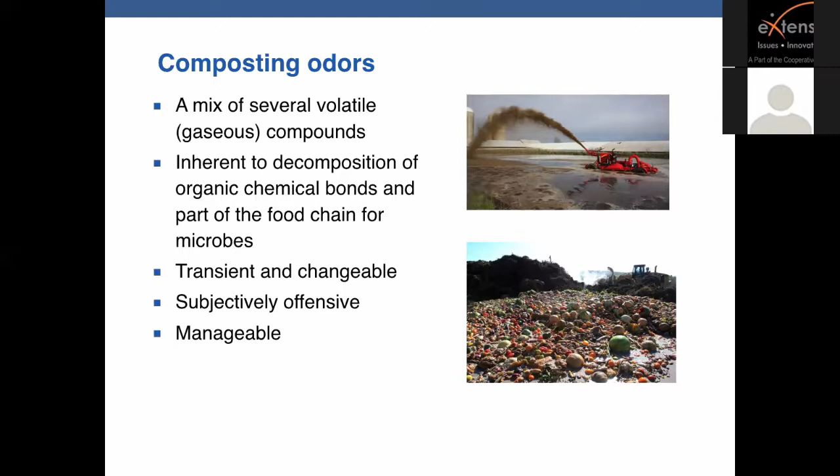Let's look a little bit at the concept of odor science, which is a very well-developed science in our country. There are different kinds of terms you'll come across in the field of odor science. Odor concentration, much like an air pollutant, is usually a mass per unit volume. Odor intensity is a subjective scale relating to how intense the odor is. Persistence is a little bit of a different concept than intensity—persistence is how certain odors can have very long duration.

I'm sure many of you have visited various waste management facilities, and while the odors weren't strong, you get back in your car and 3 hours later, you're still noticing that odor in your clothes. That's a persistent odor. Ammonia, on the other hand, you detect it, but it doesn't stick around a long period of time. Ammonia is not a persistent odor.

Character is obviously a subjective concept - is it pleasant? Is it okay? Is it not so okay? Is it truly egregious? And hedonic tone is another measure of the unpleasantness of an odor.

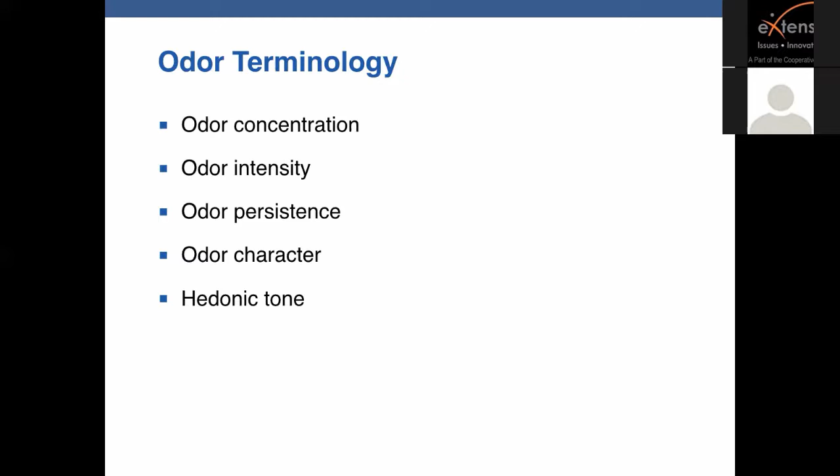Now, in terms of concentrations of odors, we use terms called the odor detection threshold and the recognition threshold. The odor detection threshold, or the perception threshold, numerically is about 1 odor unit per cubic meter of air. It is the minimum concentration in which you can detect an odor. That's that classic whiff of something you get and you go, what's that?

The recognition threshold is the concentration at which you can identify what that odor is, and it's usually 2 to 10 times the odor detection threshold. Dilution to threshold we'll get into in a minute - that's another term you'll see in odor management. Odor units and odor dilution units are also numerical values that you will see.

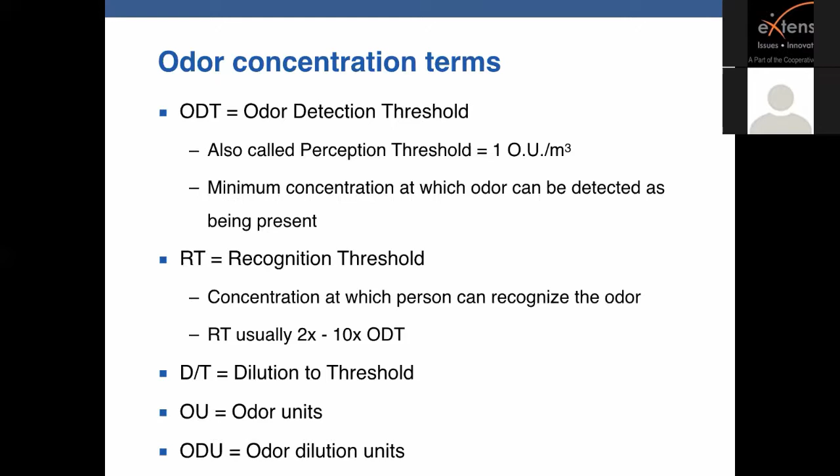The potential for something to become an odor depends on the volatility of that chemical, and volatility is the ability of the odor to leave the processing environment as a gas. As we mentioned a minute ago, the recognition threshold is the ability for that odor to produce some sort of response - positive, neutral, or negative.

And it varies from person to person, as I said earlier, because the DNA that makes up our odor neurons in our sinuses differ from person to person.

Odor concentrations can be correlated with a concept called odor index, which is the logarithmic relationship between the concentration and an index value. As you see here in the example calculation, if an odor is 500 odor units, the odor index works out to be 27.0. We'll show you some examples of that here in a minute.

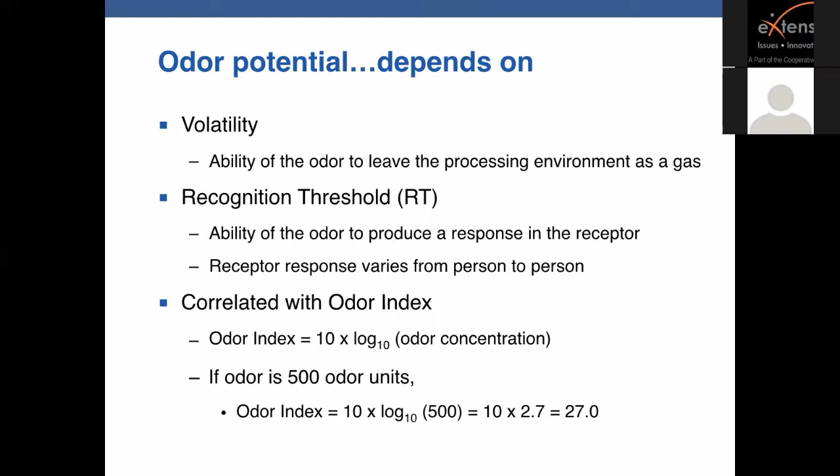Odor indices, as I mentioned earlier, is a logarithmic relationship between concentration and a numerical index value, and you see some examples here. This is from the world of wastewater treatment and sludge management. For the most part, some of these are obviously very strong odors, and you can see the various odor indices in the left column. The third column from the left are the odor units or the dilutions to threshold, and then on the right column is the list of examples of where they come from.

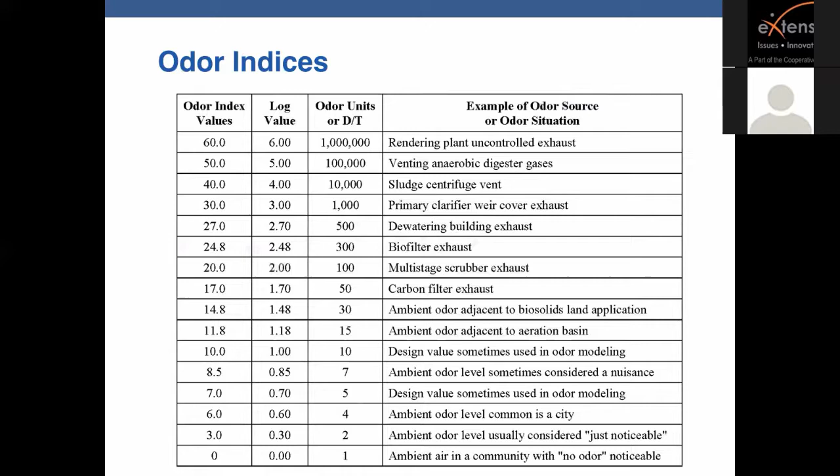Now, dilution to threshold is a physical process in the atmosphere, downstream of the source. Those of us who have been in the environmental industry for a long time remember in the early days there was a phrase called 'dilution is the solution to pollution.' That phrase fell out of favor because it implies that you can merely make the problem go away by diluting it. But in the case of odors, that's exactly what you have to do - you have to dilute the odor to get it down below the detection threshold or below the recognition threshold for sure, and ideally below the detection threshold.

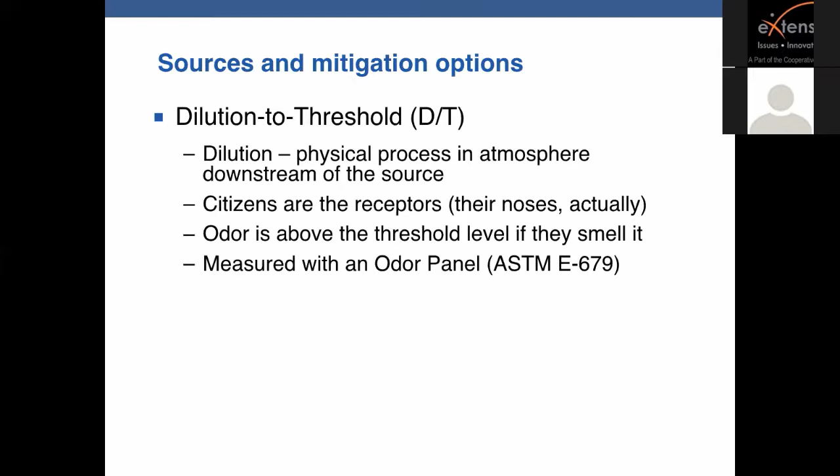So dilution to threshold is a mathematical concept, and there are ways of measuring it. The American Society for Testing and Materials has a national standard for measuring odors with an odor panel. An odor panel is made up of eight or more people who test with their noses various concentrations of a sample of odorous material. And the dilution to threshold is the number of dilutions of fresh air that are required to dilute that sample until half the panel could no longer detect it.

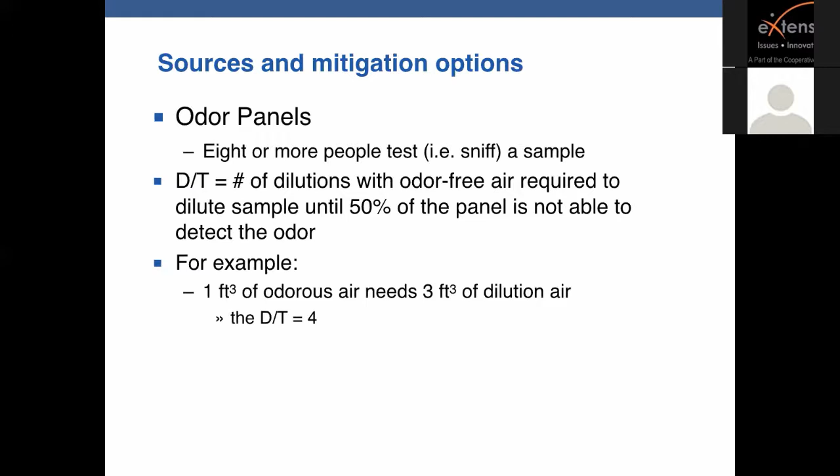So if you need 3 cubic feet of dilution air to dilute 1 cubic foot of odorous air, then dilution to threshold equals 4. Most states regulate odors on the basis of a nuisance standard, which is challenging in and of itself. There has been a lot of discussion about regulating odors based on dilution to threshold numerical values because those are measurable values, though there are some challenges in how you measure them.

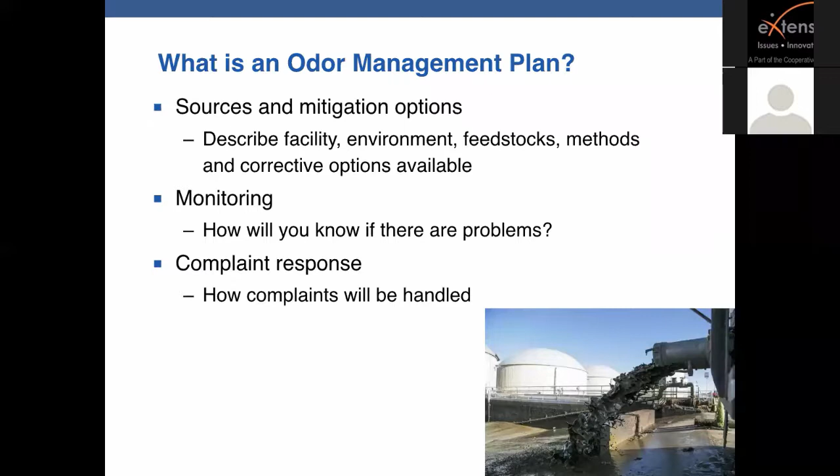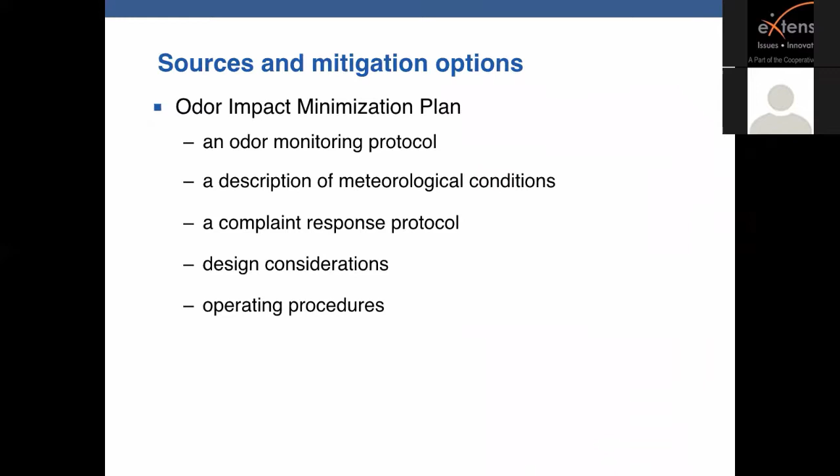Another term for an odor management plan is an odor impact minimization plan, and it has these elements: your monitoring protocol, an understanding of the meteorological conditions of the site, how complaints are handled, and how design and operating considerations are managed.

As I mentioned earlier, we have this concept of the odor chain. Odors are formed in composting and digestion, transported off-site by meteorological conditions, and the receptor, the human nose, perceives them and reacts to them. So in order to control odors, you have to break this chain somehow.

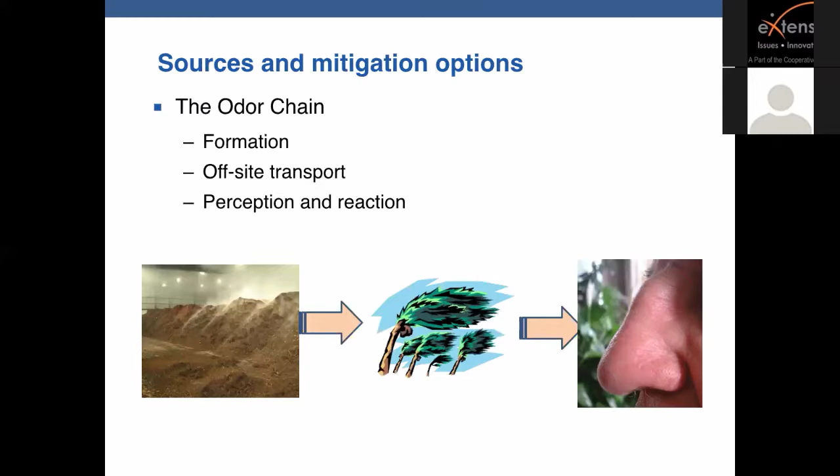Let's start with odor formation. Odors come from a number of sources in our biological manufacturing facility, which is the real concept behind composting. We have feedstocks that come in from off-site, which can be odorous. There are various preparation and mixing steps that can create odors. Active composting creates odors because of the decomposition of carbon, hydrogen, oxygen, nitrogen molecules in the pile. Curing can have odors, screening can have odors, and water management as well as dust control can have odors. So all of those are different sources in a facility.

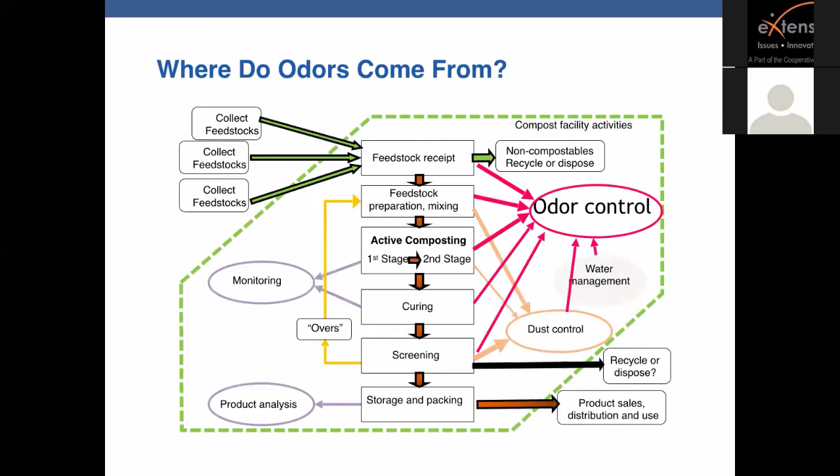This is some data from a project in Oregon a few years ago where they were having odor problems. They sent a team of air quality engineers who did detailed air sampling and analysis, and were able to find the percentage of odors coming from different sources. Obviously composting and curing would be expected, but they were surprised that 30% of the odors were coming from the biofilter, because the biofilter had been allowed to dry out and was short-circuiting, so odors were not getting treated by the filtration system. We'll talk about biofiltration a little more here in a minute.

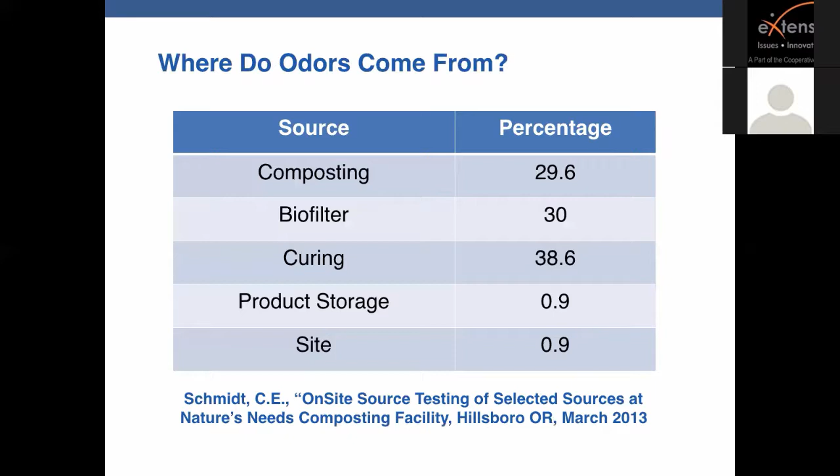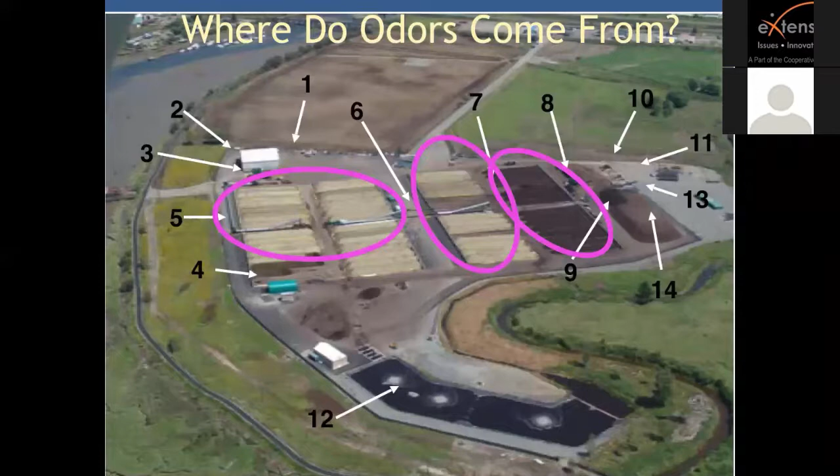This is the Cedar Grove composting facility in Everett, Washington, a 160,000 ton per year facility that uses the Gore microfabric aerated static pile composting technology. They have had a large number of problems with odors over the years and have spent many millions of dollars managing it. In their analysis, they found 14 different locations producing odors, so it wasn't just at the front end of the facility. The white building on the left, upper left, is the receiving building for solid waste and food waste coming in from the Seattle area, and grinding. The first pink oval is their active phase 1 composting, the second to the right is phase 2 composting, the third is curing, and beyond that is their screening and product storage area. Notice at the bottom of the photograph they have an aerated stormwater lagoon, and those aerated lagoons can be a source of odors. So 14 different sources at one particular facility that have to be managed in one way or another.

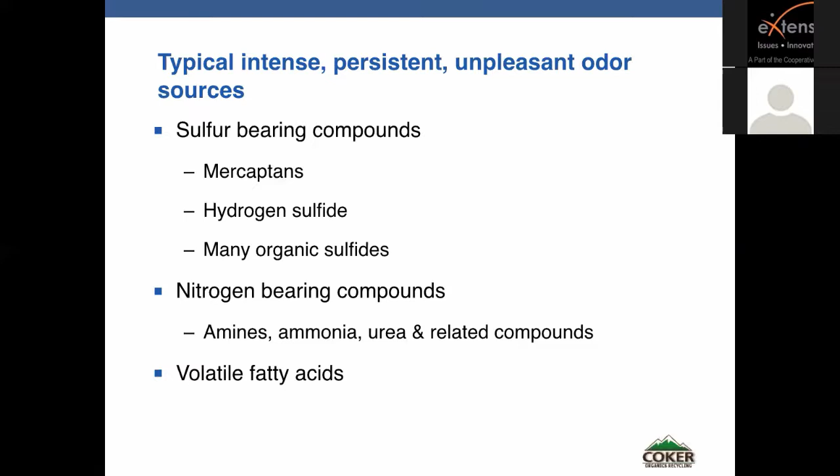What kinds of chemicals do we see in the odor profile of most composting facilities? We see the worst odors from compounds that contain sulfur, including chemicals called mercaptans, hydrogen sulfide, which many of you are familiar with, and other forms of organic sulfides. Some nitrogen-bearing compounds—amines, ammonia, urea—also have strong odors, and volatile fatty acids have strong odors.

We find there are several biological sources of sulfur in composting. We have amino acids in proteins that contain sulfur. If those proteins decompose aerobically in a compost pile, you will get mercaptans.

If they decompose anaerobically in an anaerobic digester, you will get hydrogen sulfide. Hydrogen sulfide, not being water soluble, does have a tendency to volatilize, and it tends to be more prevalent when the pH of the material drops below 7.

In some states, we see a regulation called total reduced sulfur compounds that are regulated. This is the numerical sum of the concentrations of hydrogen sulfide, methyl mercaptan, dimethyl sulfide, and dimethyl disulfide. The last two, DMS and DMDS, are organic sulfides. We see them a lot in sludge composting.

The first facility I worked at in the 1970s and 80s was a sludge composting facility in the Washington, D.C. area. And we had a 4-stage chemical scrubber to try to get the DMS and the DMDS out of the exhaust gas.

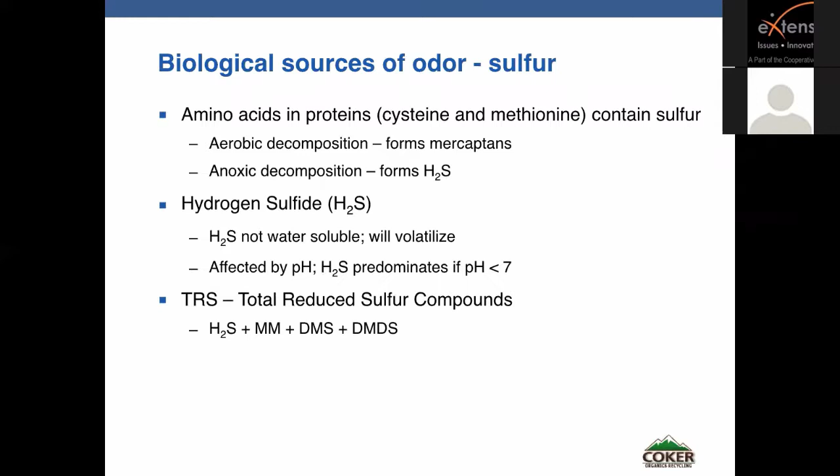Volatile organic compounds are the predominant air pollutant in organics recycling, and it could easily be argued that all odorous compounds are VOCs. Not all VOCs are necessarily odorous, but VOCs are regulated, particularly in California, where they contribute to the formation of low-level atmospheric ozone in the photochemical smog.

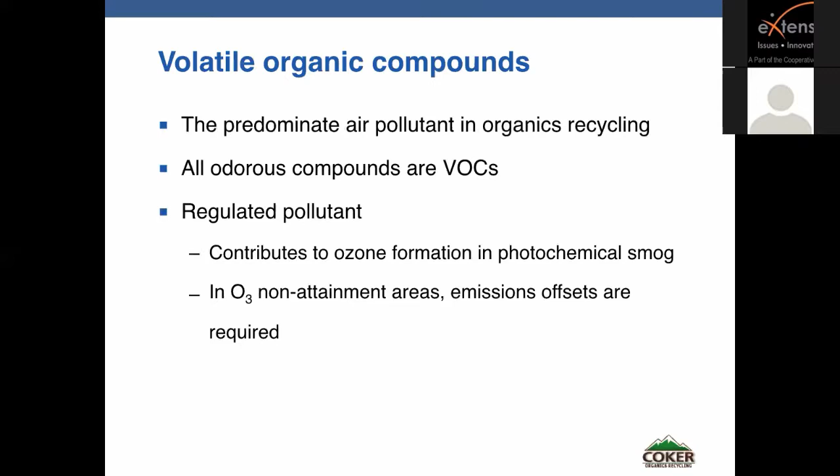So in areas where there is an ozone non-attainment, where the area does not meet national ambient air quality standards for ozone, usually some form of emission offset is going to be needed with regard to a new facility.

Feedstock receipts are a big issue in composting because feedstocks are frequently odorous when they are delivered. So if you run a facility or you have people in your state that operate facilities, they should recognize that some of these feedstocks may not be worth the tip fee because of the potential odor problems they create.

So all feedstocks need to be managed with regard to their odor potential. They need to understand their sources, their type, the potential for negative odors, and have laboratory data before they agree to accept it that understands the moisture content, the density, particle size, the degradability, the carbon-nitrogen ratio, all the basic compostability parameters that you need to run a well-defined and well-operated facility, a well-defined recipe at a well-operated facility.

Unloading protocols are important. If you're taking in liquids, you certainly want to absorb them quickly with something that's dry. You want to mix your bulking agent in upon receipt and get that material mixed and into your composting system, ideally within an hour, certainly within 2 or 3 hours.

Some of the greatest problems I've seen at facilities are where the truck comes in at 4:58, unloads on the pad, it hits 5 o'clock and the operators walk away. And it sits there all night and come in the morning and you have an odor problem.

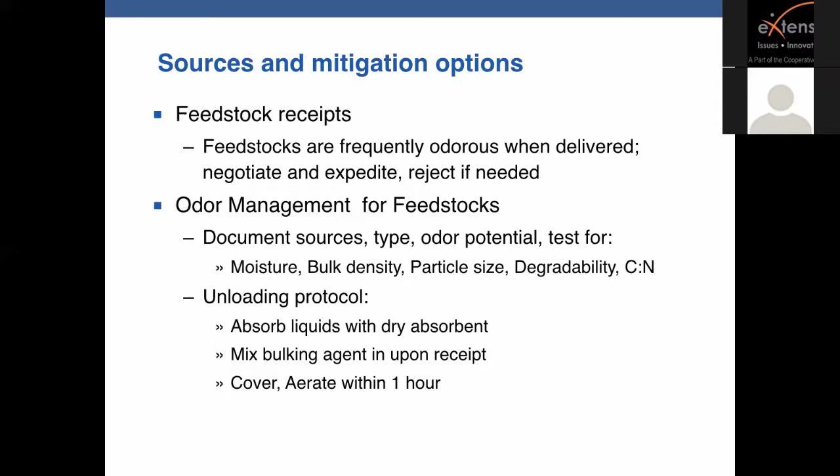So generally speaking, you would not want to receive this material if it's been sitting in that truck for more than 2 or 3 hours. And that doesn't necessarily restrict it to distance.

Consider the traffic in metropolitan areas, particularly crowded metropolitan areas like New York, Los Angeles, and Washington. Sometimes with bad traffic, it can take 2 hours to get across the city. So when these materials come out of these trucks, if they've been in there for a while, they are going to have an odor profile with them.

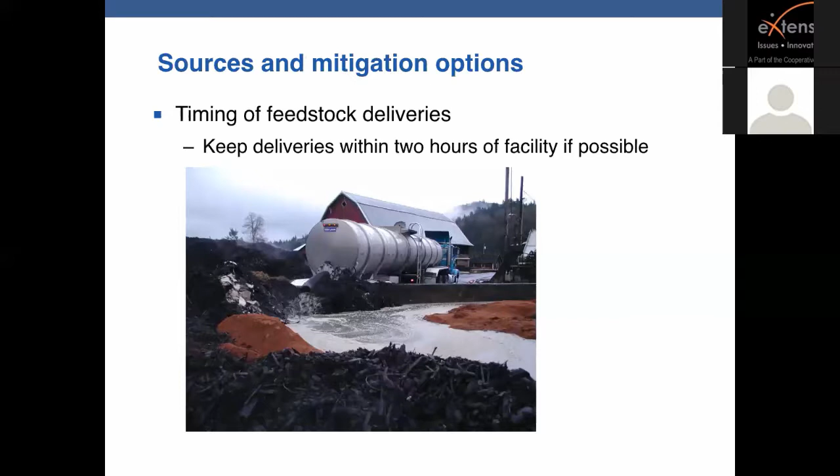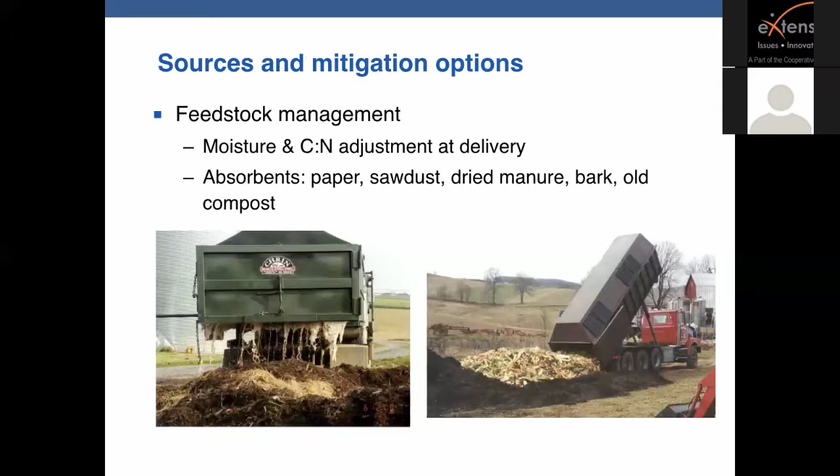Those of you who have seen food waste composting operations have seen this happen. Food waste tends to liquefy in the transport truck, and when you unlatch that back gate and open it up, there usually is a rush of free liquid that is often very odorous. So it's important that operators unload these wet, sloppy materials on a bed of dry amendment. You see here on the left a bed of mulch, on the right a bed of compost, and that helps soak up the liquids and minimize the formation of bad odors.

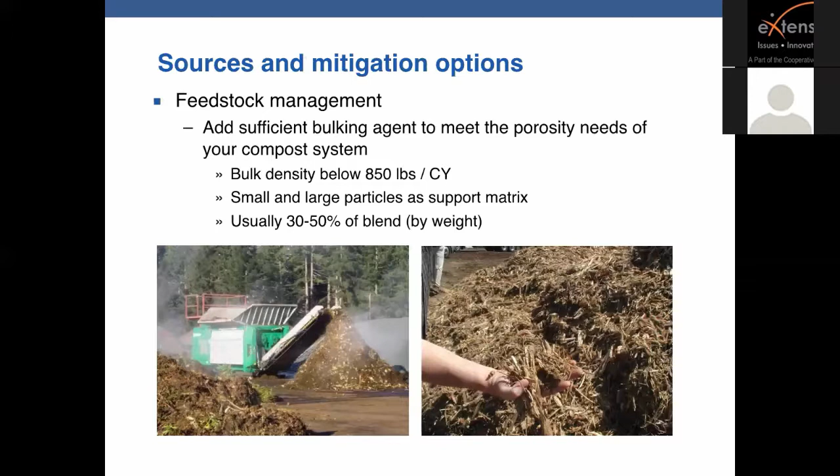You want both small and large particles in your support matrix in order to ensure good free airspace. It can be by weight as much as 50% of your total blend, and in some cases where you have woody materials with high lignin content, it can climb up above 50%.

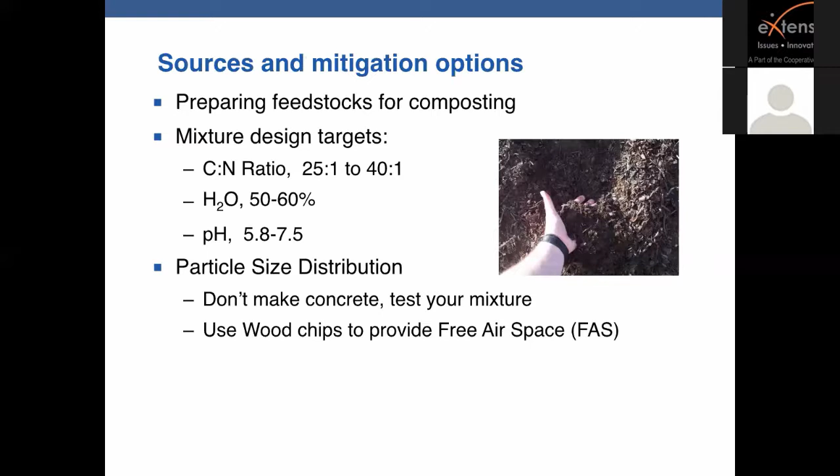You always want to mix your fresh ingredients with bulking agents within hours of delivery. Usually what you want to do is put your dry material down, add your wet material on top. If you're going to turn with a bucket loader, which is a very inefficient way of mixing, you really need to go through it 4 or 5 times to get it mixed correctly.

If you have a windrow turner, or the facility has a windrow turner, they are very efficient at mixing materials together with a couple of passes, and many facilities now have a standalone dedicated mixing system. At one of my facilities, I used an old agricultural feed mixer, and it worked just fine.

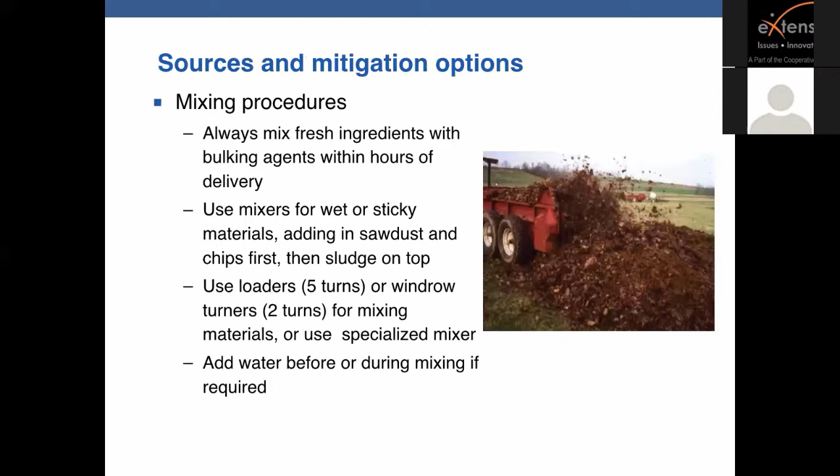Odors are going to be released most in the first 14 days of composting, because that's when the most active decomposition is going on. You have higher biological activity and higher oxygen demand. So for facilities that have aerated static piles, you have to make sure you have adequate air supply to meet that high demand in the first couple of weeks. For facilities turning windrows, you have to turn fairly frequently in that first 14 days, but you've got to be careful not to turn at the wrong time.

Here in the mid-Atlantic, in the fall, between early fall and late spring, sometimes you'll get a very stagnant air pattern that sets up early in the morning. In some cases you can see it as a bank of fog that drains into river valleys and stream valleys. That stagnant air is going to stay stagnant until the sun comes up and heats the atmosphere. If you turn a windrow at 9 o'clock in the morning when the air is very quiet and still, you are going to create odors that hang close to the ground, and they could create problems. And obviously, if the wind is blowing in the direction of a sensitive receptor, it's never a good time to turn.

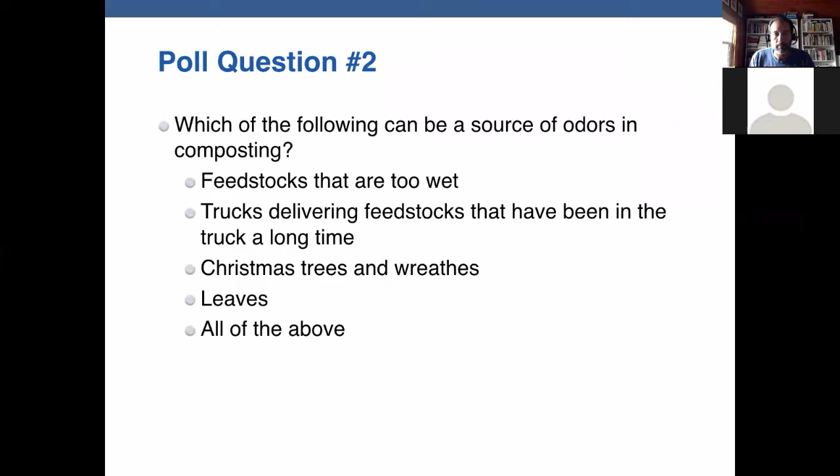Lack of oxygen is our main reason for odors in a compost pile. Terpenes, the chemical responsible for the smell of fresh cut wood, and ammonia are formed even though there is oxygen in the pile. Odors will normally form in anaerobic pockets or zones, and all compost piles have anaerobic corners or pockets. So by aerating and turning, you will release those odors that are trapped in the pile.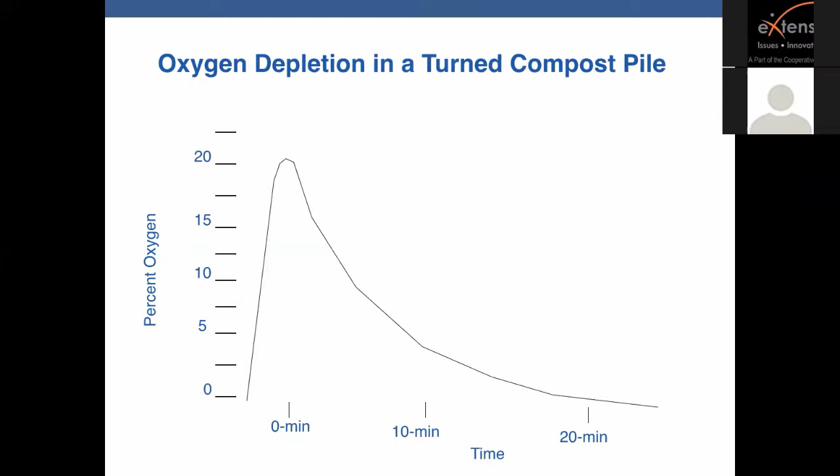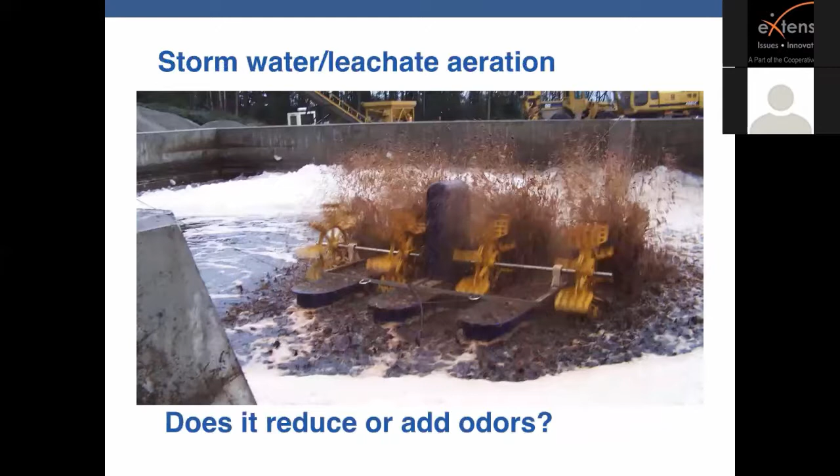Stormwater is becoming an increasingly important matter in composting facilities. As you saw in the picture of Cedar Grove in Washington State, they use aerators in their storm pond. You see an example of an aeration system here. Does this reduce odors or add odors? It actually does both. It reduces odors by increasing the oxygen content of the water in the pond, which helps degrade the odorous materials, but it also volatilizes odors by throwing a lot of stuff up in the air.

Other sources you'll find on your sites: screening. Even though you should be screening only material that is biologically stable and ideally fully mature, you can still get some odors from screening by virtue of the fact that dust particles can have odorous molecules affixed to them.

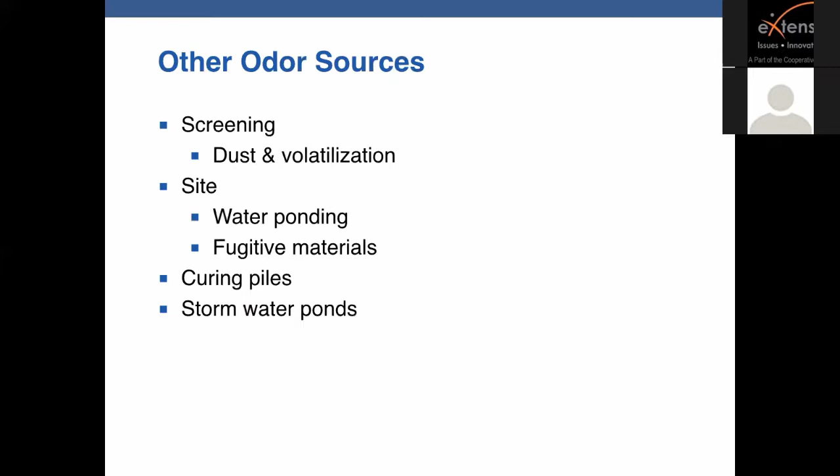Sites are a big source of odors, particularly from ponding and materials that escape from a pile, what we call fugitive materials. Curing piles, as we talked about, and stormwater ponds. Here you see a facility where water has been allowed to pond up on the uphill side of the pile. That pond, that little puddle, is going to have organic materials in it that will decompose anaerobically. The bottom of that pile is saturated to the point where oxygen cannot get in, so it too is going to go anaerobic, and those are going to be sources of odors at a site.

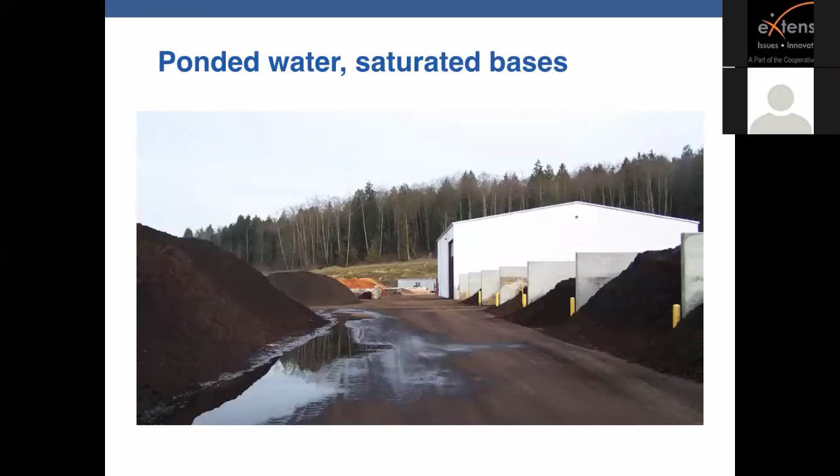Turning procedures that operators should have for turned windrow operations are shown here. They need to have in their operations plans and operating procedures well thought out and well managed processes for turning windrows regularly as needed, but with one eye on the weather and on wind direction.

For aerated static piles, the design has to have enough air to meet the initial oxygen demand of primary decomposition. We're beginning to learn that aerated static piles dry out much more than turned piles. So there is often a need to break the pile down, moisten it, and rebuild the pile to make sure everything degrades properly.

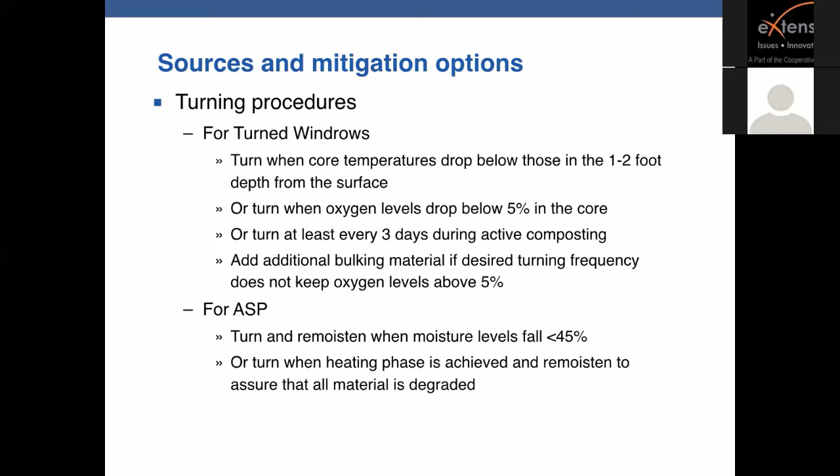Some methods of controlling odors are what are called biocovers. Biocovers involve different approaches: a couple inches of screened compost, a little bit thicker layer of unscreened compost, or just a layer of woody overs, as you see in the lower photograph. You have to be careful, because if you look at the upper photograph, the operator has his loader bucket extending over the pile too far, and as he's shaking the compost out to cover the pile, he is covering the bottom of the windrow.

Remember, windrows breathe. Hot air comes up from the middle and is replaced by cool air coming in from the side. In the upper photograph, there's a real risk, particularly if you're using screened compost, that you will choke off that replacement air supply by making it impossible for the windrow to breathe.

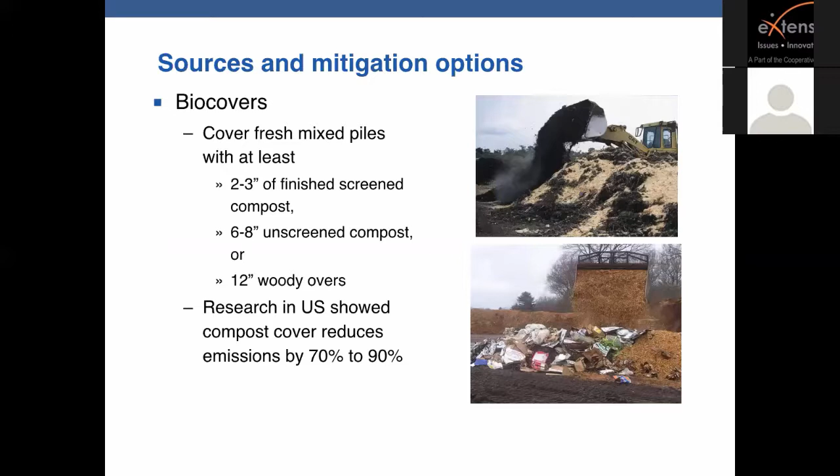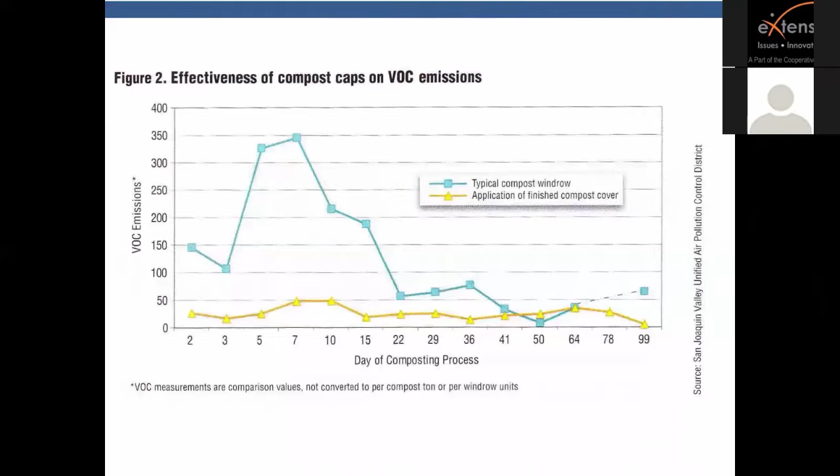Research by San Joaquin Valley Unified Air Pollution Control District and others in California have shown significant reduction of VOC emissions with these compost caps or biocovers. In this graph, the blue line is the VOC emissions from a typical compost windrow, and as you can see, maximum VOC emissions, AKA odors, occur in days 5 through 10. With a compost cover over it, virtually none. So the data shows as much as a 70 to 90% reduction in VOC emissions with compost covers.

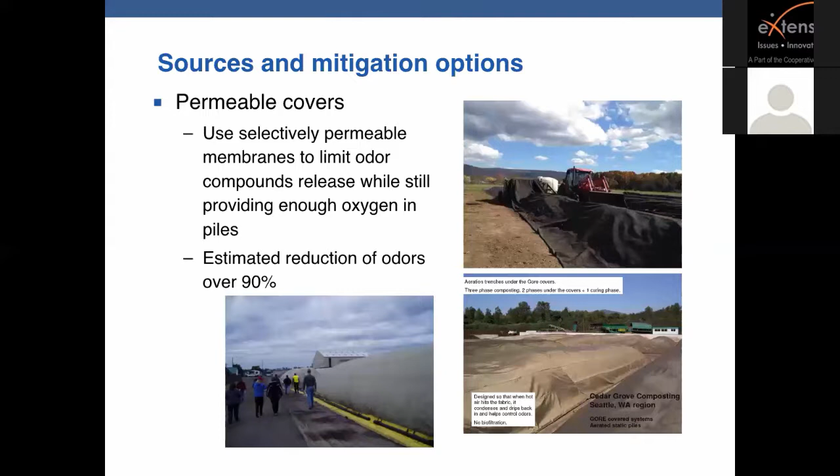These have good potential for reducing odors. We see some facilities using surface reactants that are claimed to be odor neutralizing chemicals. But if you think about the chemical nature of odors, it's not just one chemical, but rather several chemicals combined with different effects, intensities, and hedonic tones. It's a little hard to understand how one chemical spray can knock all those odors out, and I tend to be a little skeptical about some of these misting or spray systems.

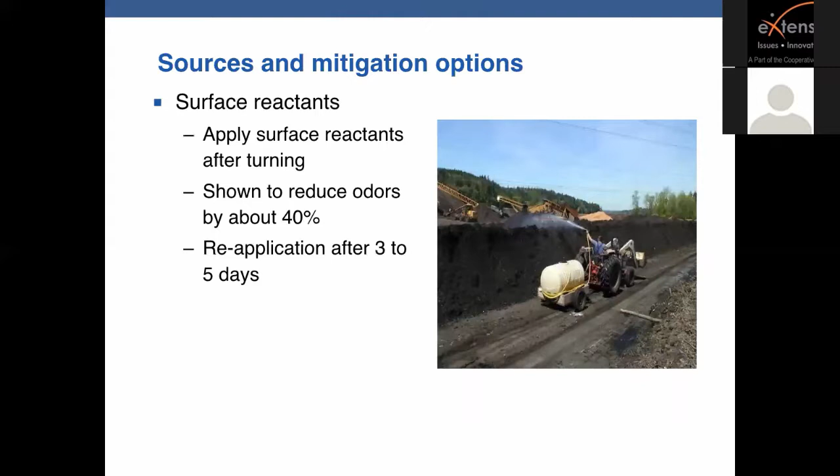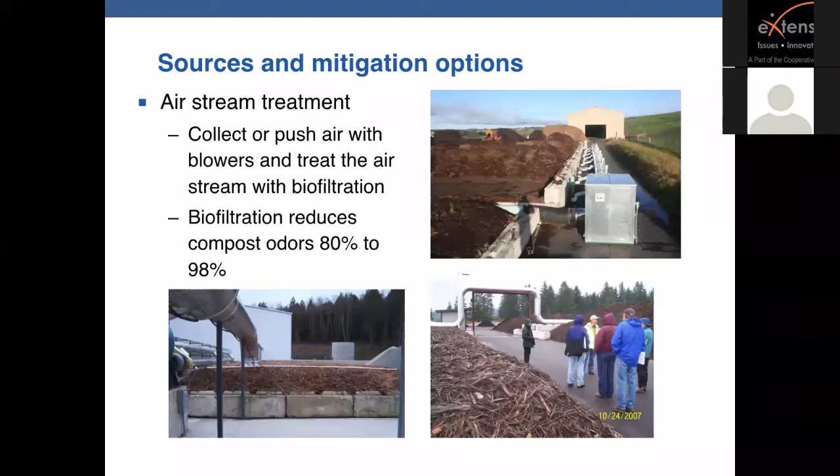Now, you can certainly treat the air if you have the ability to capture it with a biofiltration system. Biofilters are really nothing more than very large compost piles, and you can get a very effective reduction in odors with the use of a biofilter. You see several pictures here. What happens in a biofilter is that the organic compounds in the exhaust air are absorbed into the water layer around each particle in the biofilter, which is why biofilters need to be kept moist. The microbes live in that biofilm and degrade the pollutants in the exhaust air, just like they degrade the components in a compost pile.

The media has to pass the exhaust gases through, but not so quickly that the microbes don't have time to do their job. So we design these for anywhere from a 45 to 60 second gas retention time, during which the microbes digest, degrade, and oxidize the compounds.

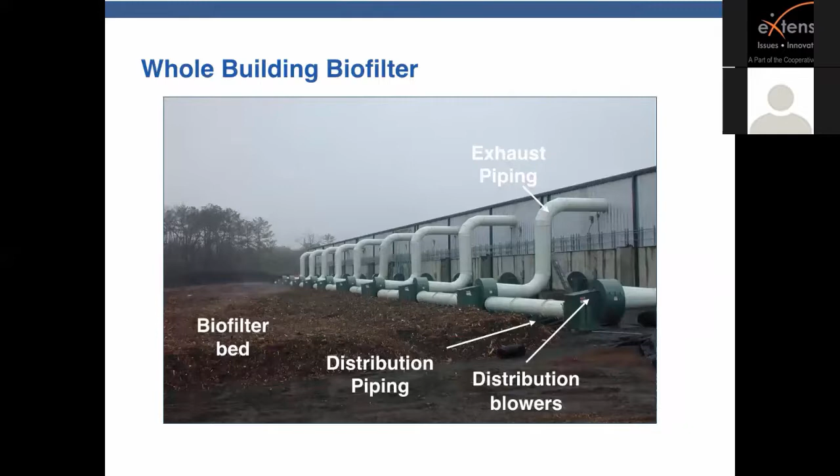This is a facility I designed in North Carolina for biosolids composting. Again, obviously all in a building, and there is a growing trend in our industry to move composting facilities under roof. In this example, we have exhaust piping in the upper side wall of the building, pulling air out through the distribution blowers and into the distribution piping, which lies underneath the biofilter bed, about 4 feet thick.

Very effective, very inexpensive to build. When the biofilter media ultimately gets exhausted, you clean it out, compost the biofilter media, and replace it with fresh media. You have to do that about every 3 to 5 years.

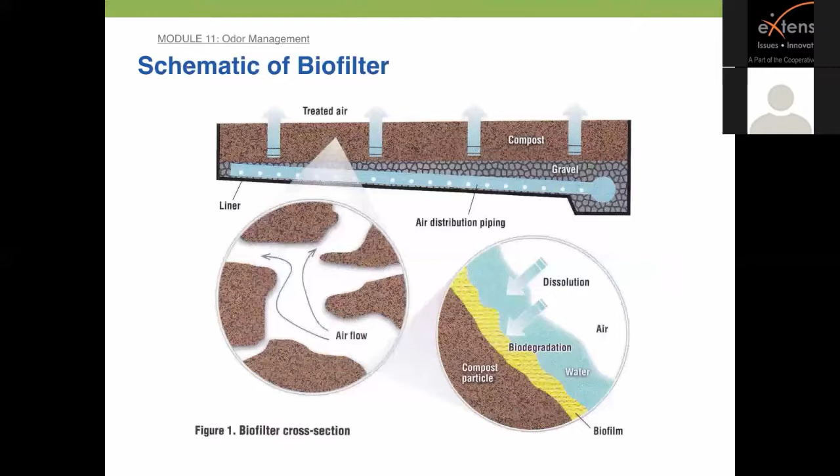That's sources and mitigation options. Now let's talk about monitoring. How is a compost facility going to know if it has a problem? Well, for that we need to understand the transport mechanism that links odor sources with odor receptors. There are a number of different ways for odors and air pollutants to be removed from atmospheric conditions.

They are diluted by air, particulates settle out, and rain washes odors out of the air. Every one of us has walked outside after a rainstorm and noticed the air smells noticeably different. There are photochemical reactions from sunlight that affect odors, and absorption by plants and soils. Absorption by plants is one of the most important reasons why you need a very healthy and vigorous vegetative buffer of both lower and upper canopy around all processing areas in a composting facility, so those plant leaves intercept particulate matter and help keep odors from leaving the site.

Now, dilution is not just the wind blowing. There is a vertical movement to the atmosphere created by solar heating, so the atmosphere moves both horizontally by virtue of wind and vertically by virtue of temperature. And there are times—everybody's probably heard the term temperature inversion—that's a unique meteorological phenomenon that can trap odors down near the surface. So you have to understand the micrometeorology of every site you work at.

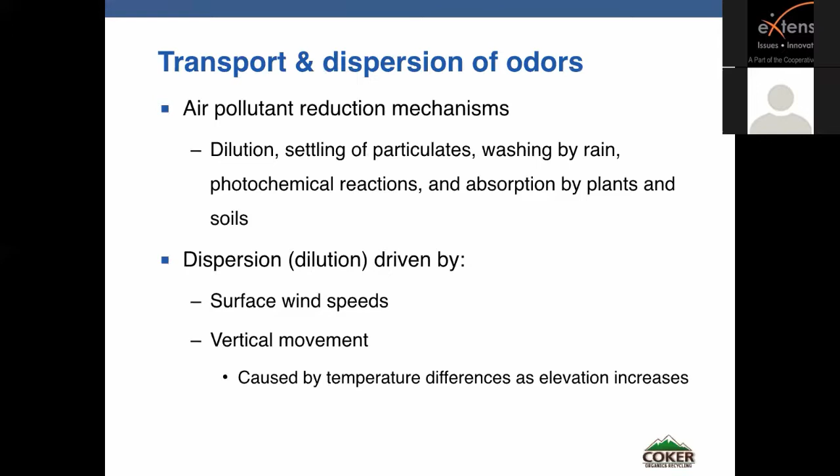Every facility should have the ability to monitor atmospheric conditions to understand how the weather is potentially affecting operations. These meteorological stations—I get mine from a company called Forestry Suppliers—run less than $1,000, and they measure wind speed, wind direction, and rainfall. The more advanced models monitor other meteorological phenomena.

All that is recorded on a computer, so the operator has the ability to look at the data. If the phone rings and Mrs. Smith, who lives west of the facility, says 'I can smell your facility,' you look at the data and realize the wind is coming from the west and blowing east, so it's not really likely Mrs. Smith smelled your facility. If you don't have that data, you don't have the ability to make that argument.

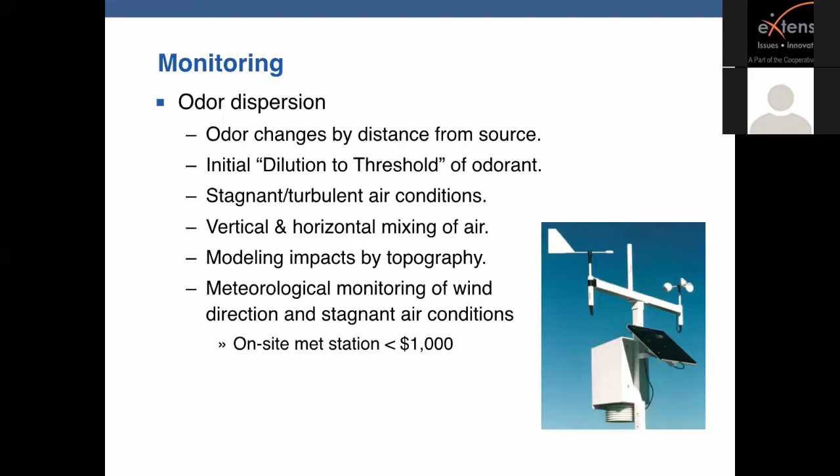This kind of meteorological data is normally measured at a local airport. I live in the mountains of Virginia, so there are topographic issues where the airport data may not be exactly accurate for a particular site due to terrain. But if you live in a flatter area and you're within 20 or 30 miles of an airport, that data is probably pretty representative of the site you're thinking about.

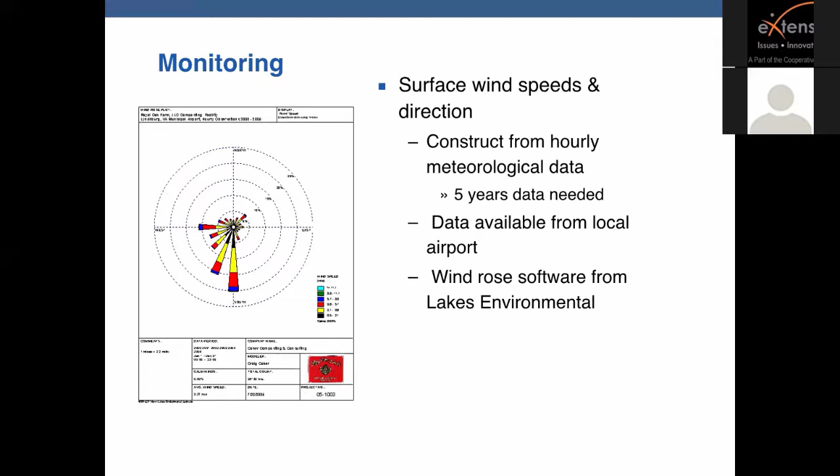Monitoring protocols have to be in place as part of the odor management plan. You need a daily routine evaluation. It's very important that whoever's doing the human olfactory detection not be somebody who works at the site all day, because if you work in composting all day, you become inured to those smells and odors, and it becomes very difficult to detect anything.

This is a composting facility in Prior Lake, Minnesota, outside of Minneapolis. There is an industrial hygienist who works for the owner, and every morning at 5:30, that young man drives around to these different monitoring stations with what's called a nasal ranger—a field olfactometer in which he can calibrate dilutions to threshold at each station. That way they have a database built up over time of exactly where and when odors are occurring, which allows them to respond in the event of an odor complaint.

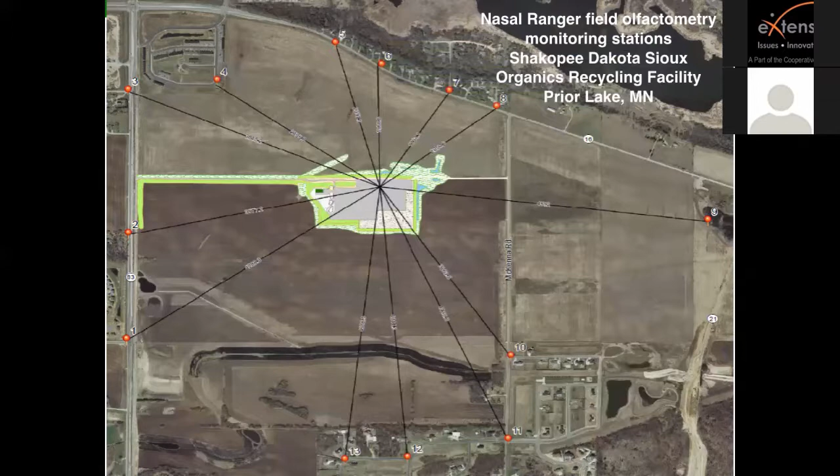This is the kind of regional or area-type odor management system. Some of these distances—it's a little hard to see on the slide—but for example, from the center of the facility to monitoring station number 9 on the right is 4,500 feet. So some of these can be pretty far away.

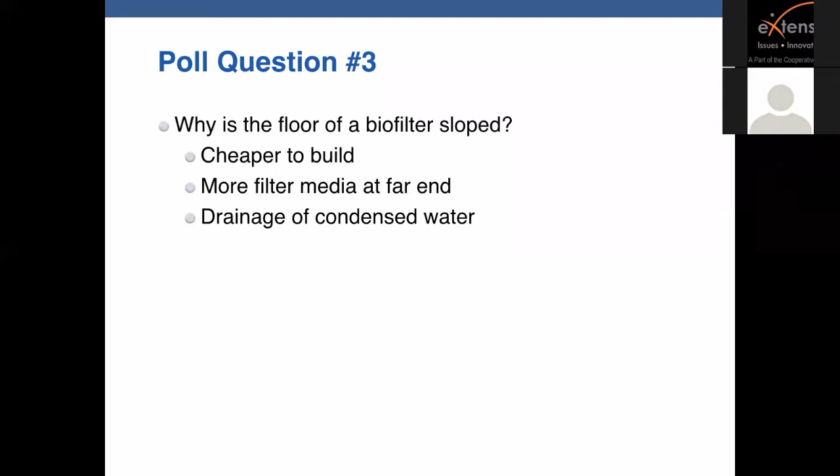Poll question number 3: Why is the floor of a biofilter sloped? Is it because it's cheaper to build? Because there's more filter media at the far end of the slope? Or for drainage of condensed water?

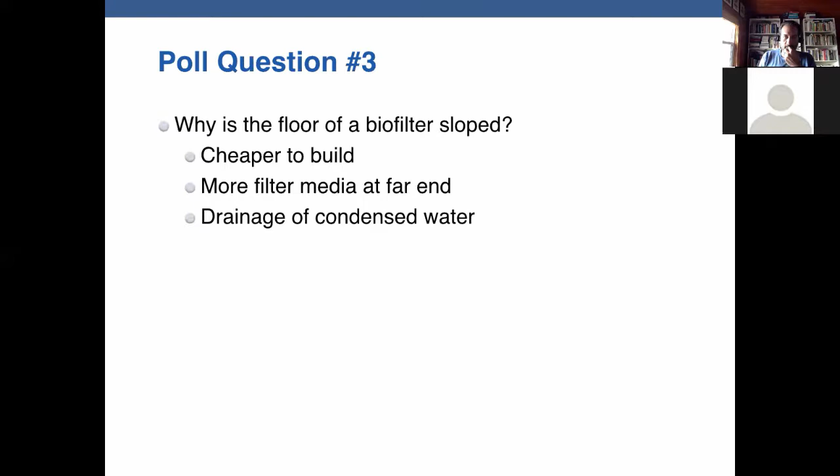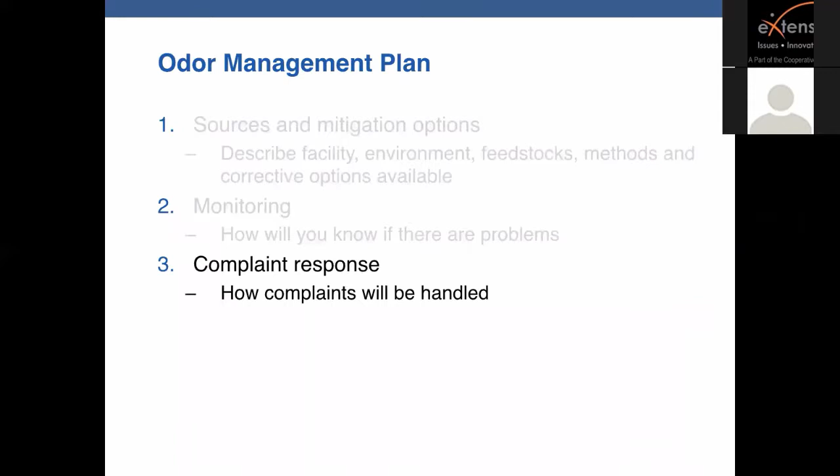The last part of an odor management plan is how you handle complaints. This is a challenge because whoever's calling to complain is probably upset, and upset people don't always act rationally. But it's important that operators and managers treat everybody with respect and stay proactive, keeping the community informed and communicating the odor management plan. Let people understand that you recognize their concern is valid.

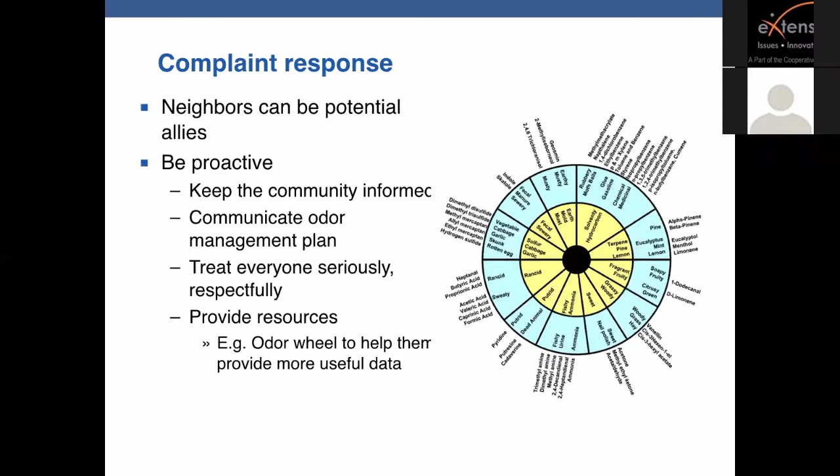Complaint protocols require that you have a fairly standard form. The Texas Commission on Environmental Quality has a very interesting form called FIDO, which is short for frequency, intensity, duration, and offensiveness. And those forms are used by Texas composters to track any odor complaints. So you have time, location, and weather characteristics.

Ideally, you try to verify, and this is where regulators have such a hard time with odors. At the facility in Prior Lake, Minnesota, I was showing you earlier, there were complaints registered by people who noticed an odor as they were walking out the door to get in their car. And thanks to cell phones, you can make a call and file a complaint with a regulator before you start your engine. And yet the regulator then has to travel from his or her office to the site and verify that odor is still occurring.

Well, sometimes they're so transient that that's very, very hard to do. But nonetheless, it's important that operators of compost facilities and digestion facilities work with neighbors to try to verify problems when they occur. And as I said before, documenting everything.

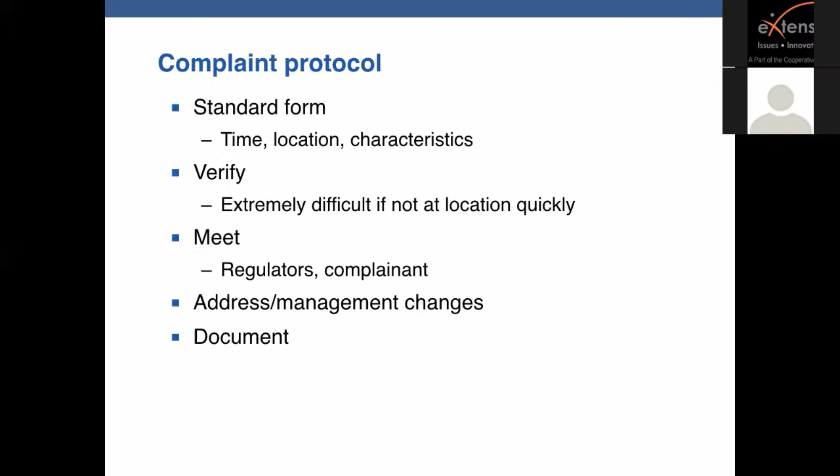So odor management plans make operators responsible to the community. They allow for the planning of the consequence of odors before problems emerge. It provides a mechanism for response and for communication, and provides a process. So all facilities should have an odor management plan that understands the sources, the mitigation options, the monitoring procedures, and the complaint protocols.